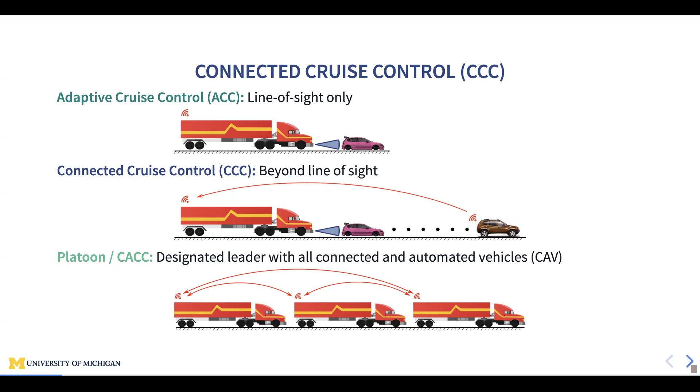Considering the current scenario where connectivity is still limited, we propose something called connected cruise control, where we do not expect all vehicles on the road to be connected to each other, but we assume some vehicles are connected and some are not. This limited connectivity can bring us beyond-line-of-sight information. The question is, with this additional information, how can autonomous vehicles utilize it, and how does that information benefit the vehicle in terms of safety and efficiency?

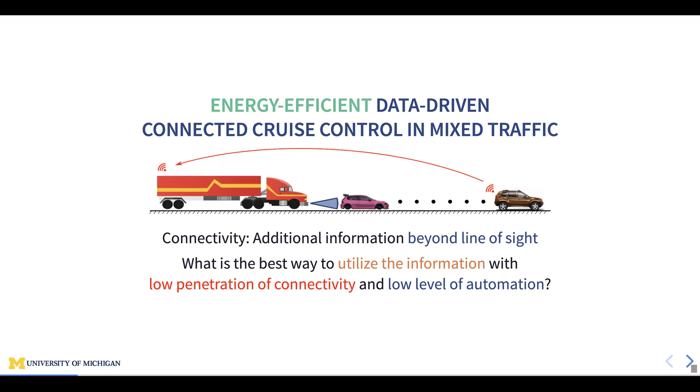Especially, we are focused on energy efficiency. So before we talk about energy, we first have to write down the equations and understand what kind of energy we are talking about. Here we write down the longitudinal dynamics of the truck. The truck dynamics are nonlinear in the sense that we need to think about rolling resistance as well as air drag, and the main driving force is the torque from the wheel.

It may be accelerating or braking torque, and the torque itself can be very complicated. The torque can be saturated, especially for trucks, because of power limits and braking limits. So it can be very complicated, and it can also be delayed. There can be delay in the powertrain system. So basically, when the controller sends a signal, it may take a few hundred milliseconds before the powertrain really executes this signal.

So we model this into two terms. We compact the nonlinear dynamics in the F, and we deal with all the saturations and delays in the second term.

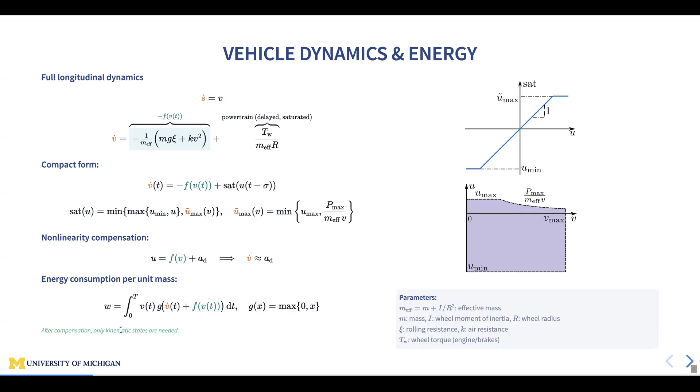But sometimes, for different powertrains, we can have different g(x). For instance, there can be energy recycling, so the g(x) may be different. So here, only the kinematic states are needed.

Before we dive into the controller design, we want to understand what scenario we are looking at, especially what kind of human driver behavior looks like. So here is a trajectory we collected on the road. This experiment was conducted even before I joined the lab.

It was 2018 when my lab had eight vehicles driving in a chain on a public road, and we observed some of the braking and acceleration patterns, and recorded this speed trajectory for all eight vehicles.

There are two pieces of information I want to highlight. First, human drivers are string unstable, in the sense that for the vehicle in front—for instance, the brown vehicle hits the brake—the other vehicles will brake consequently, and each vehicle will brake harder and harder and harder.

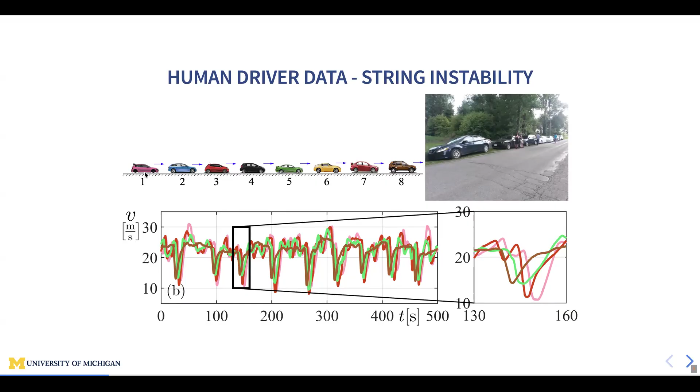So keeping these two in mind, we can start to design the controller. First, we can start with a simple reactive controller, where we have two terms. The first term, the alpha term, basically decides the desirable velocity for the given headway.

So basically, when the vehicle is close to the front vehicle, we want to drive slowly. But when the distance is far away, we can drive freely. The second term is the synchronization of the velocities.

So the idea is that when we see the brown vehicle hit the brake, we kind of know that the red vehicle will also brake a few seconds later, right? And with this knowledge, we can brake earlier in order to avoid sudden brakes.

There's something that's actually counterintuitive I would like to highlight: in the controller, we introduce additional delay to the feedback loop. This means that when we see the brown vehicle hit the brake, we do not want to immediately hit the brake, but instead we know the red vehicle will take a few seconds before braking. So we deliberately delay our reaction to the brown vehicle. The question is how much delay we want to have in the controller.

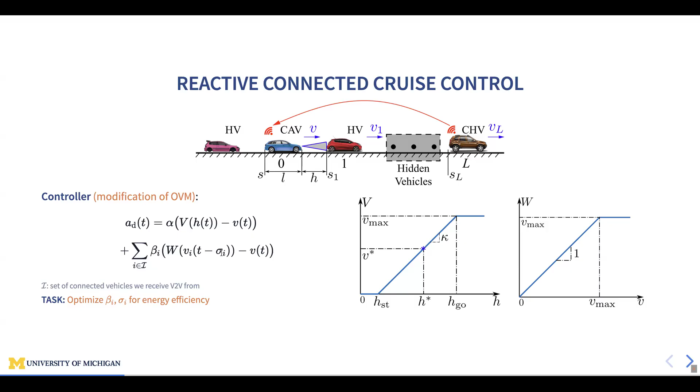So the parameters we can optimize are beta and the additional delay we introduce. Because of the delay, the problem becomes very complicated—like how to relate the parameters, beta and sigma, to the energy consumption.

The way we solve this problem is we consider the scenario as a stochastic system. So consider the system in the closed loop. The inputs are the velocities of different vehicles we are connected with, and the output is the velocity of the ego vehicle. We can even linearize the closed loop system and write down the transfer functions.

When we consider it at a linear level, there's something called spectral theory, where we can do spectral analysis. So now we consider the inputs, basically the speed of the other vehicles, as stochastic, and especially we consider them as stationary.

For a wide sense stationary process, and when it's also a Gaussian process and differentiable, we can actually prove that the average energy consumption of the ego vehicle is proportional to the standard deviation of the acceleration of the ego vehicle. Then, using spectral theory, we can connect the average energy consumption to the...

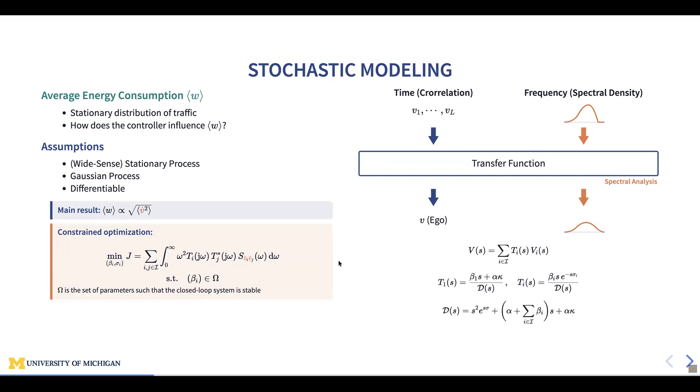Let's look at some results. Here we consider two kinds of simulations. On the top, the trajectories look more smooth - it is the linear simulation, meaning we ignore those power saturations and nonlinear effects in the longitudinal dynamics. On the lower side, we take all this physics into account in the simulation, and we can compare.

We can fix the velocity of vehicle 1 and vehicle L, and compare the trajectories of different controllers like ACC, where there's no connectivity - we see a lot of variations in the velocity that definitely consumes a lot of energy. With connectivity, we can achieve much smoother trajectories.

We can see with the introduction of connectivity, it immediately reduces 16% of the energy consumption. And when we take into consideration additional delays, we can have an additional 2% reduction in energy consumption.

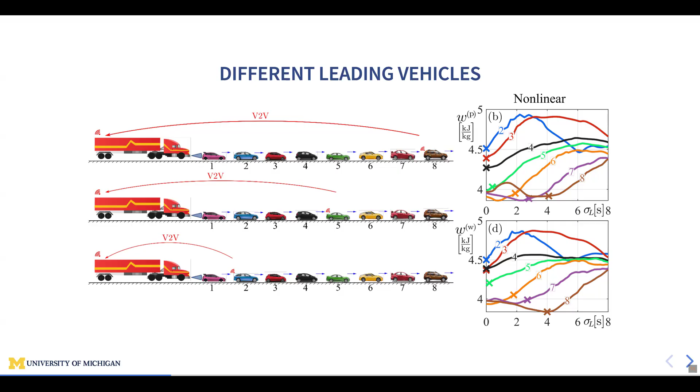Something interesting is that we essentially do not really know which vehicle we are connected to. In mixed traffic with sparse connectivity, we may be connecting to vehicle 8, we may be connecting to vehicle 2, and we can show that our method can find good delays for any kind of configuration - it is ignorant of what vehicles we are connected to.

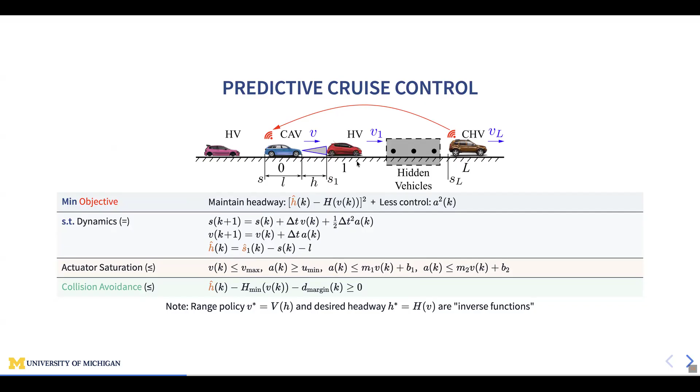So here is the reactive controllers. The next question is, what about the MPC? In the MPC, there's a predictive controller. It has the advantage that we can consider multiple objectives and multiple constraints altogether in the controller. In the MPC, the key problem becomes how we predict the speed of vehicle 1.

When we are driving in mixed traffic with sparse connectivity, the challenge becomes we do not really know what's happening in the middle. We can detect vehicle 1 using radar, and we can connect to vehicle L using V2X connectivity. But what about what's happening in the middle? We don't know how many vehicles are driving between, and what are the states of each hidden vehicle.

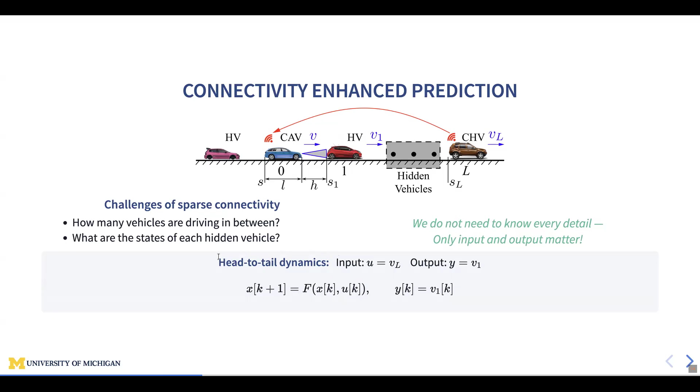There are a lot of uncertainties, and it turns out we do not really need to know every detail - we only need to worry about the inputs and outputs, and we basically consider the hidden vehicles as a black box. Now we are considering the head-to-tail dynamics. The input is the speed of vehicle L, the vehicle in the distance, and the output will be the speed of vehicle 1, the vehicle immediately in front of the ego vehicle. We want to find the head-to-tail dynamics from the data we observe.

So here it becomes a more abstract point of view. Since we are focused on the inputs and outputs, the question is whether we can have the abstract model, like on the left hand side. We consider the system - it can be a linear system for simplicity - and we have a data set.

We keep collecting the data of the speed trajectory of the vehicle in the distance as well as vehicle one in the front. We want to learn what the dynamics of the system is, and the goal for the MPC purpose is: we are given the initial conditions, like the input in the past few seconds, and we want to know what the output will be in the next few seconds.

So with this, we can feed our predicted YF into the MPC as the prediction of the behavior of the vehicle in front. The idea is that Willems' fundamental lemma deals with this. It ignores what's happening in terms of the state X, but focuses on the behavior of a system at the input and output level.

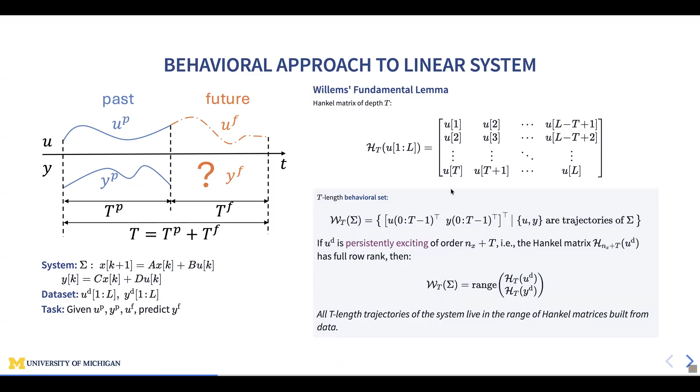Using this lemma, we can formalize the optimization problem like this. We organize the data set of U and Y into this Hankel matrix, and then we can solve this optimization, which is essentially a linear least squares problem, to get an estimation of the future output.

And because the input is the velocity of the remote vehicle, we also have little idea about what their future behavior is. We can also use some autoregressive estimators. Combining this together, we get an estimation of YF.

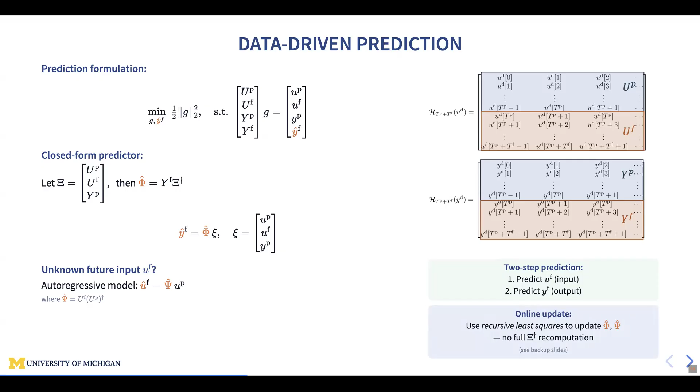Another good thing is that although the least squares problem can be expensive to solve—because as we keep collecting data, the matrix becomes wider and wider, making it harder to solve the optimization directly—we can use recursive least squares to recursively update these parameters, so that these predictions can be very fast.

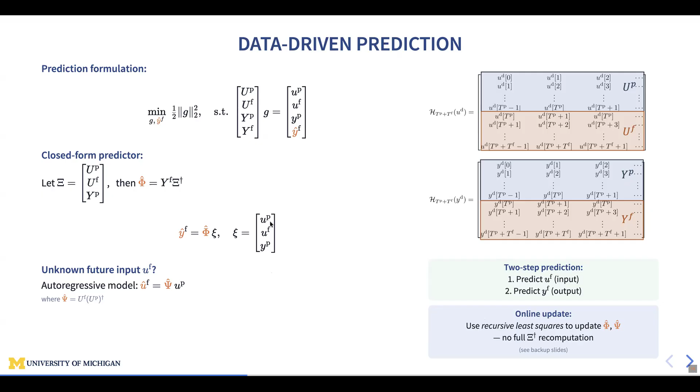So let's jump into the results, the prediction accuracy, comparing multiple methods. For instance, the IDM method basically means we have an IDM model and we want to estimate exactly how many vehicles are driving in between, and estimate the state of each hidden vehicle. This method can be very expensive, and the result is also very bad compared to our input-output, head-to-tail dynamics estimators.

Something interesting is that there's a plateau of the standard deviations, which changes when the ego vehicle connects to different leading vehicles. It turns out that when we connect to a vehicle farther away from the ego vehicle, it can help us in terms of prediction accuracy.

An intuitive explanation is that we consider the position as a shifted copy—each vehicle is a shifted copy of the vehicle in front. So given the past horizon TP, we want to estimate the ego as the red curve. It turns out that because of the shifted copy pattern, when we connect to a vehicle farther away, we have more information about what's going to happen in terms of the inputs.

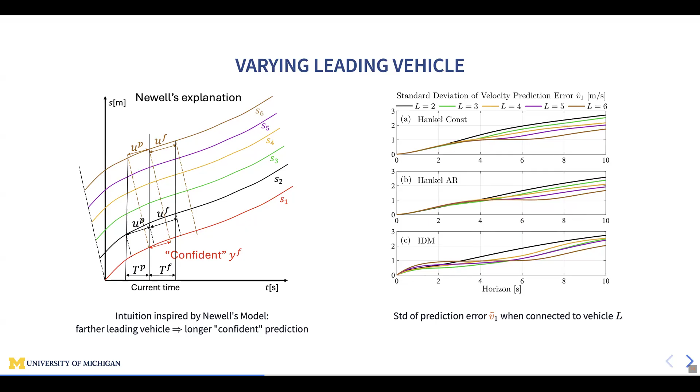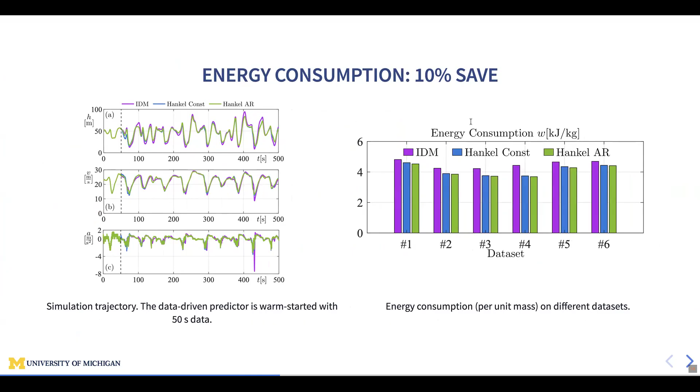We can then compare the energy consumption—we can save about 10%, compared to the predictive model with IDM.

So here's a summary of energy efficient cruise control. We talked about the reactive controller, and the predictive controller, and showed that the controllers can save energy even with low penetration rate.

That concludes my research at the University of Michigan, and now I'll move on to Aurora. I'll guarantee there's no more equations or math in the following slides. So I will talk about Aurora.

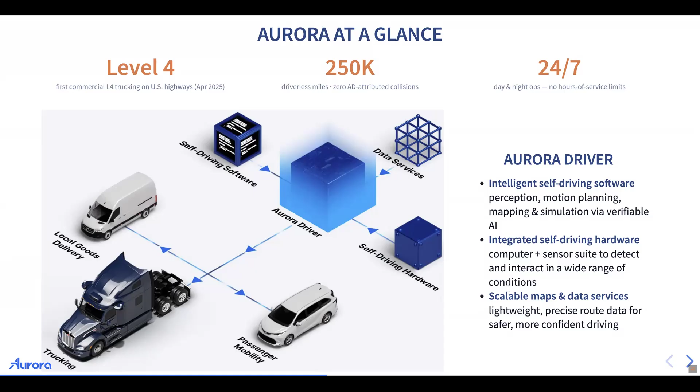So we are collaborating a lot with a lot of OEMs, and we are doing the freight delivery for many of the logistics companies, and we are still expanding our customers as well.

Now let's dive into more technical details. First, the architecture of the Aurora software can be composed into several modules like localization, mapping, and perception, planning, control, and simulation. We want to test the functionality of each module in the simulation. So the simulator will need to be able to test each individual module as well as the system end-to-end.

Why do we need to do the simulation? The first reason is that we want to make sure our trucks are safe, and essentially we have five different levels, five aspects of our safety: proficient, fail-safe, continuously improving, resilient, and trustworthy.

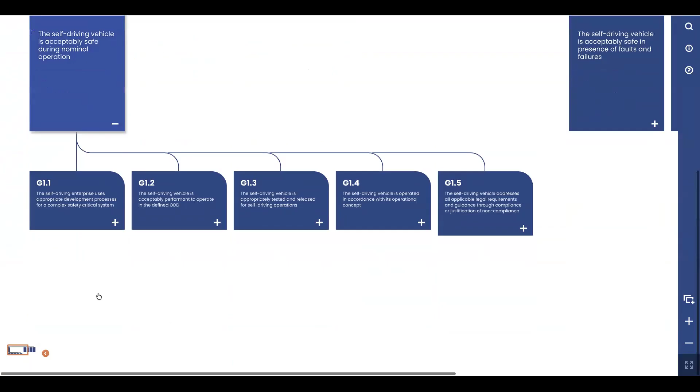This can be leveled down into many very detailed levels. You can see it's essentially a very large framework. For the proficiency, there are a lot of aspects we want to investigate, to make sure our product is reliable enough, proficient enough. And this architecture can be traceable to concrete evidences, including the test results, audits, and peer reviews.

Because of our very comprehensive safety requirements, we want to do extensive simulations. The problem is that real world operation can be very expensive, and we want to test all the combinations of different scenarios we may see, which can be a combination of different weathers, different traffic, road geometry, and sensor state. We can go on and on.

With the simulation, we can essentially efficiently test our system at scale, and we want to make sure that each code change on the vehicle can go through comprehensive testing to make sure it's safe and reliable.

The biggest problem we have in the simulation is the sim-to-real gap. There are actually two ways to approach this. One way is sim-to-real validation, where we focus on the fidelity of the simulation, and whether we can trust our simulation results.

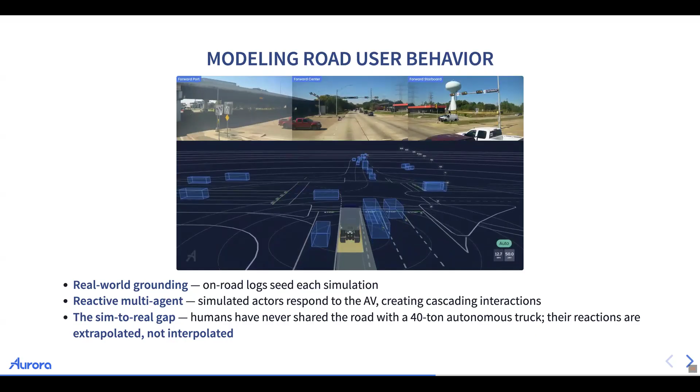We are also developing reactive multi-agent tests. The simulated actors can respond to the AV's behavior, creating cascading interactions. This is very challenging, one reason being the sim-to-real gap: humans have never shared a road with autonomous trucks before, and their reactions are extrapolated, not interpolated. That means there can be a lot of uncertainties in the other vehicle behavior.

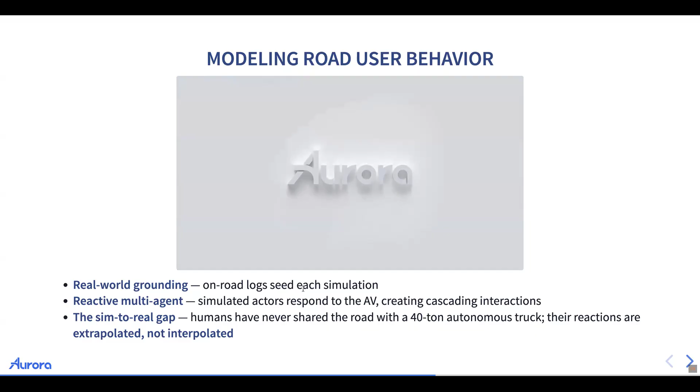So the problem of this reactive modeling is that we're still not sure how useful, and how much attention we want to pay to the sim results in these simulations.

And apart from the simulation, Aurora also did some research in terms of energy efficiency and sustainability, based on the published white paper in 2024.

So it's essentially a lot of intersections between what I did at Michigan. First we can analyze where the truck energy goes. It turns out a lot of energy goes to air drag, rolling resistance, acceleration, and elevation, with only about 40 to 50% on-road efficiency. Especially at highway speed, air drag dominates the useful energy budget.

So we have multiple ways to improve energy efficiency. There's a plan that immediately after business launch we can do optimizations like limiting peak speed, reducing idling, and reducing deadhead. In the middle term we can apply more eco-driving techniques, and in the long term we can do even deeper optimization in terms of powertrains and vehicle design.

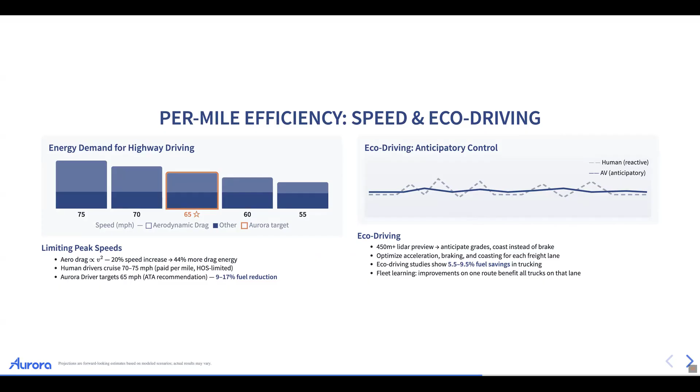We can also apply eco-driving techniques, making our speed trajectory smoother, avoiding stop-and-go and sudden accelerations, which can save another 9% in fuel. This is for per-mile efficiency, which applies to every single truck. But as an autonomous driving company, we're able to optimize at a broader, system level—we can reduce deadhead and idling.

For utilization, human drivers shouldn't drive more than about 11 hours within a 14-hour driving window, but our AVs can basically run 24 hours a day, 7 days a week. This means we need fewer trucks for the same freight volume, which also contributes to energy reduction.

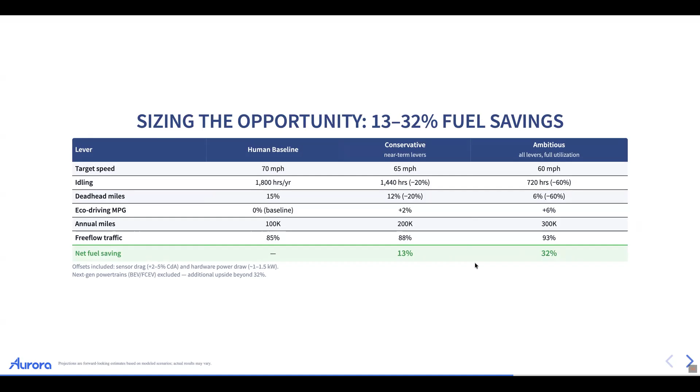We're near the end of the talk, and I'll talk about Aurora's next steps. After the business launch last April, we've actually expanded our routes threefold. Initially we only drove between Dallas and Houston, and now we're able to drive all the way to Phoenix.

In the longer term, there are some financial goals, and at the technical level we're looking at expanding our ODD, for instance to support more scenarios like rain, heavy winds, and light snow. We're expected to expand throughout the Sun Belt, and in the future there's a plan to move northward.

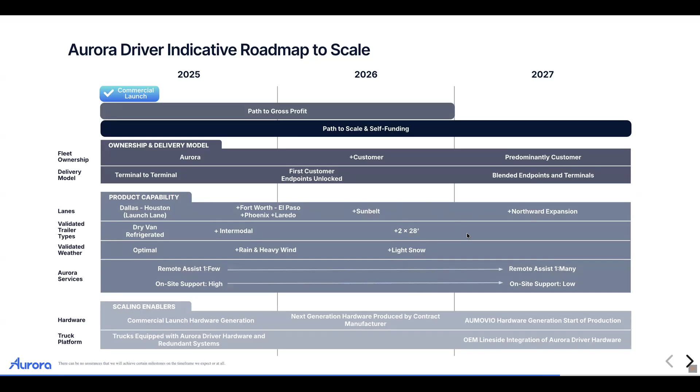In summary, I talked about the safety framework and why we need simulation to verify the system at a large scale. We discussed behavioral simulation, the sim-to-real gap, and real-to-sim challenges. We also talked about energy efficiency, and our plan for delivering autonomous trucking at a larger scale. That's it for my presentation.

Luckily I got it in time. Now it's time—I'm open to any questions if you have. Thanks for the wonderful talk.

Hi Minghao, thank you so much for your great talk. I'm really curious about your team in terms of behavioral simulation. Can you elaborate more about how you define the behavior here? Are you trying to model the car itself or model the pedestrian? I remember during your slides you mentioned that in your simulation it's very rare to include pedestrians.

I also noticed that you have slides in terms of sim-to-real and real-to-sim. Does that mean it's similar to a digital twin? I guess it's still related to the behavioral question - are you trying to build a digital twin for your company to use? I'm always curious what the definition of digital twin is, so maybe we're just having different names for similar things.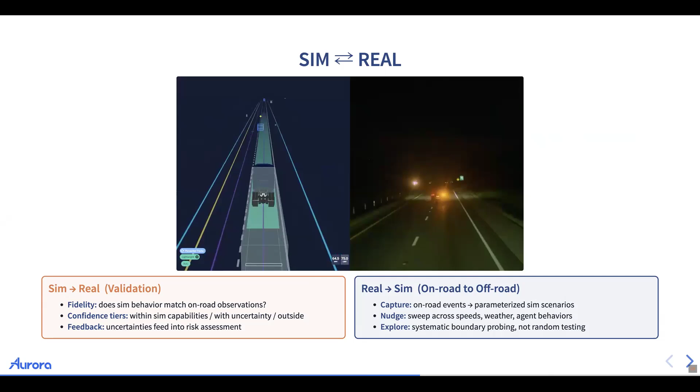The idea of sim-to-real and real-to-sim is something we want to use to make sure that when the system passes the test in simulation, it will be safe on the road. On the other hand, when we see an accident or a human intervention takeover in the real world, we want to exactly reproduce them in the simulator so we can debug what's going wrong.

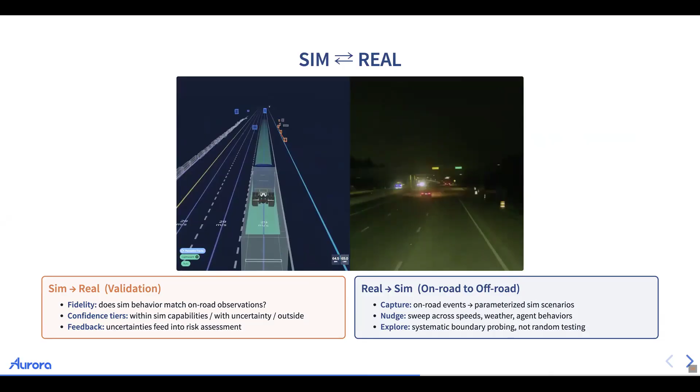So basically real-to-sim refers to, because your cars are already on the road, they keep collecting data - computer vision and videos - so it feeds back to the platform you built to further enhance it. Yeah, essentially we can even reconstruct those scenarios from the sensor data. Got it, thank you.

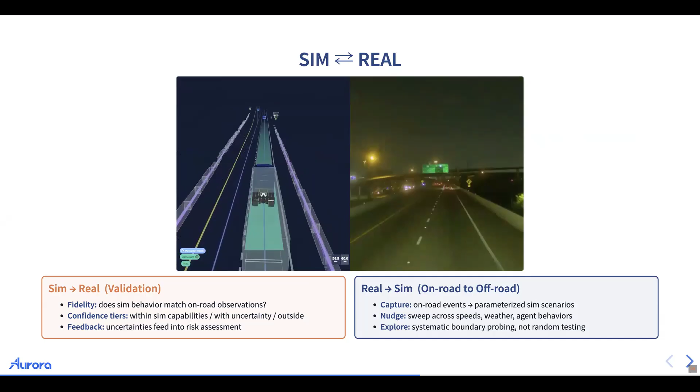So it seems to me the industry has moved from AV 1.0 software, where it's modular in the way you describe on this slide, to AV 2.0, where it's end-to-end in the sense that there may not be separated modules doing perception, planning and control that you could interrogate if you want transparency or validation. I won't ask details on the software strategy, but I'm curious for the safety case framework, which is of utmost importance - is the safety case framework defined such that it prevents AV 2.0 and end-to-end frameworks? Can you talk about that interplay? Can you do end-to-end perception to control and still come up with a safety case framework?

That's a good question, a very good question. What's good about the current modular design is that we're really able to trace back all the way from any failures to do the triage of what module goes wrong. But for end-to-end, it seems very difficult, and it becomes more like a black box.

Essentially, if you look at those definitions of proficient, I believe it's still an open question how we can really build a framework. On the other hand, this framework can be a good guidance for us to build our test data set. Even for end-to-end driving, we want to be able to reliably evaluate the capabilities of the system by testing it on diverse enough testing data. So starting from this framework may be a good guideline to design what is a good benchmark for the system. Does that answer your question?

Yeah, I think your answer, of course, it's important that there's no US regulation on what these safety frameworks are, right? This is private industry self-regulating itself. Maybe there's some level of consensus happening across the industry, but what I'm getting from you is this is a starting point, and as the software architecture evolves, maybe we don't have to start this framework from scratch. Okay, I think that's what I'm getting. All right, I have to jump.